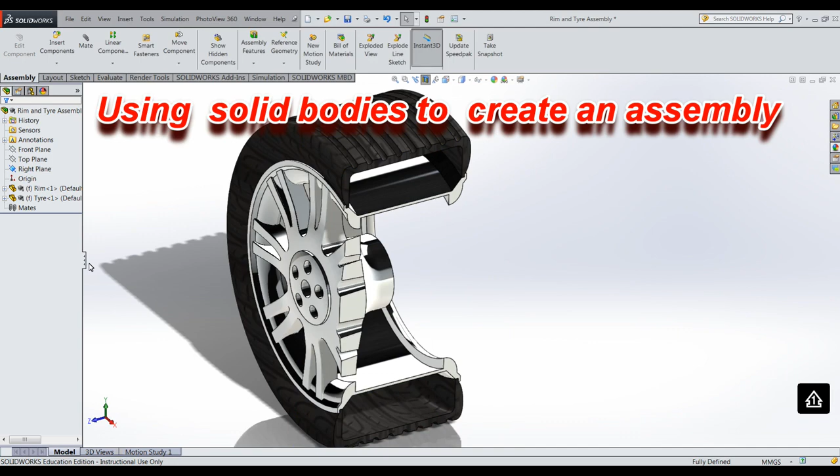We could have used just the solid bodies itself to draw the whole item, but it would be much more difficult, so we could draw the parts individually, the rim and the tyre. We mightn't get as good of features showing up on this.

What I want to do now is turn off some of the items here. I'm going to turn off the tyre for the rim and leave the rim on its own, and save this as just a rim. You can see I've got the main part all saved originally as well.

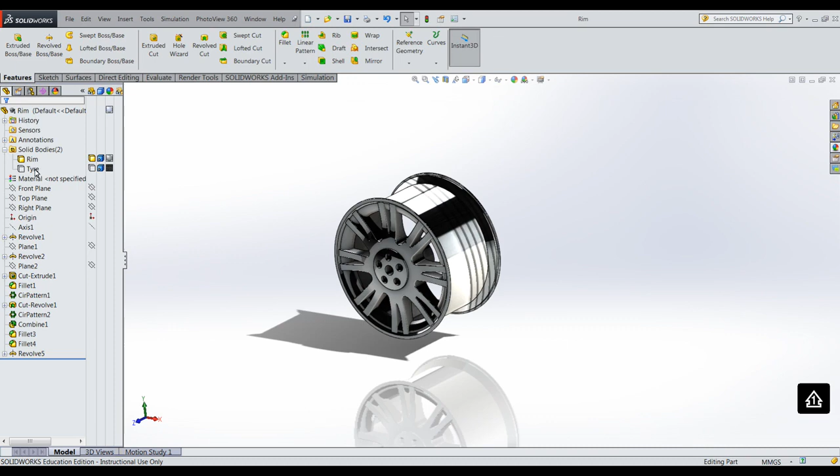I'm going to turn off the other one now, and save that individually as just a tyre. So I've got these two items together.

Sometimes when you're working with individual bodies, trying to match them up and get sizes correct is very difficult, and trying to mate them is quite difficult as well. So here you'll see it's incredibly simple to do.

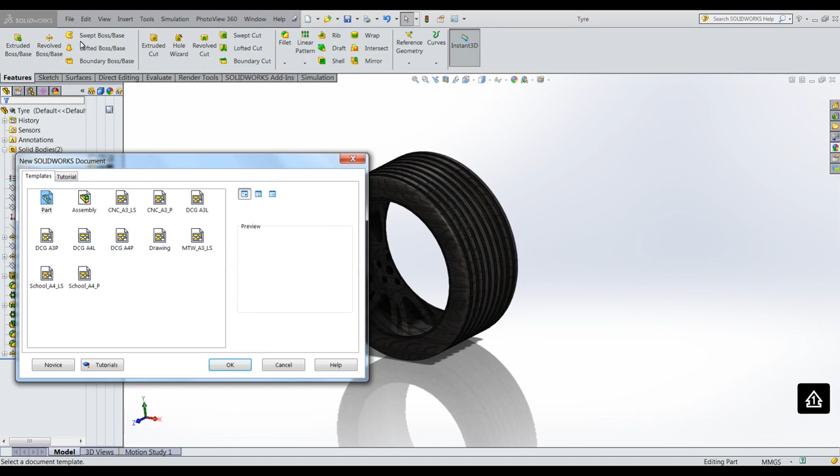We've saved the rim and the tyre separately, and we've got the master done of the whole lot together, which was quite easy to model because you're modelling them all in the one drawing.

So I open up my new assembly. You can see the tyre is shown here. I'm just going to open up the rim, and what I'm going to do is draw this over, but I'm not going to click it in.

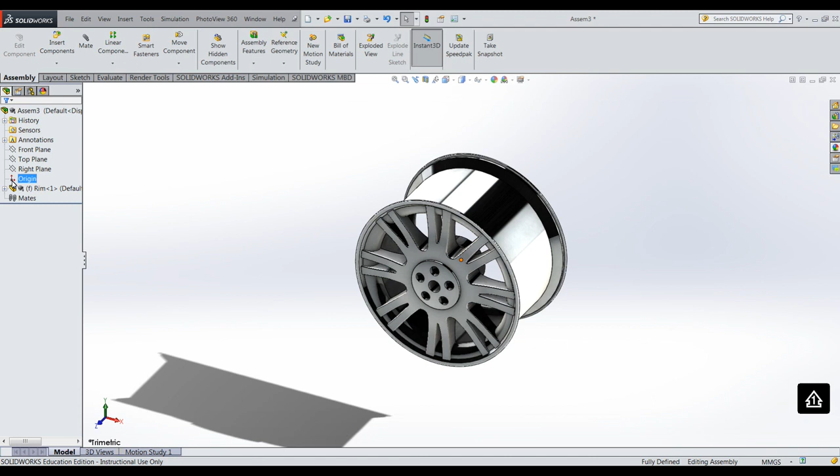I'm going to just hit enter twice. When I hit enter twice, it puts it into the drawing in relation to the origin, and you can see that it's fixed. Now I want to put in the next part to my assembly, and to mate this here, I just pick my tyre again.

I don't click it in here. I hit enter twice when I have it in the drawing part, and it puts it in relation to the origin. This is super easy to do by comparison to, say, drawing individual parts and trying to mate them up.

As well, for the modelling, as you're going along, it's incredibly easy to model one part up to another part, and you know that it's going to work out size-wise, and for the design it's much easier. So it's something worth doing for modelling parts.

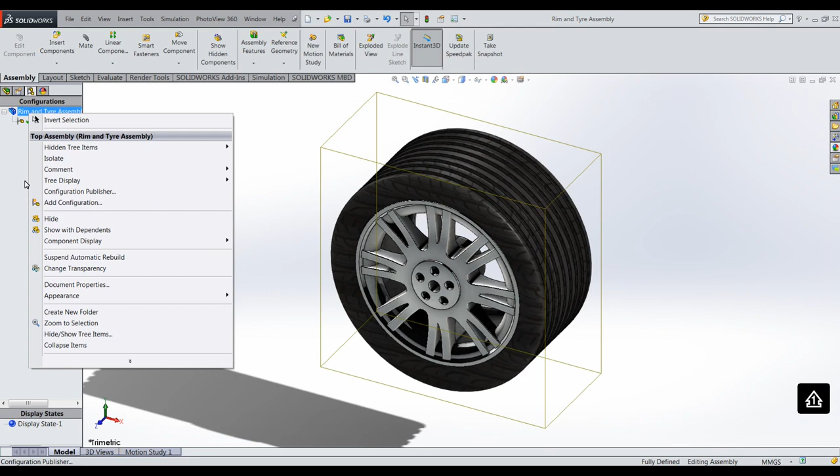And that kind of concludes really where we're at with our assembly. You can actually do your exploded view in this as well too, as you would normally do where you have parts and combine them all together, and you can open and close that as you would want.

In this particular one, I suppose it's particularly easy because you're working off a centre as a circular pattern.